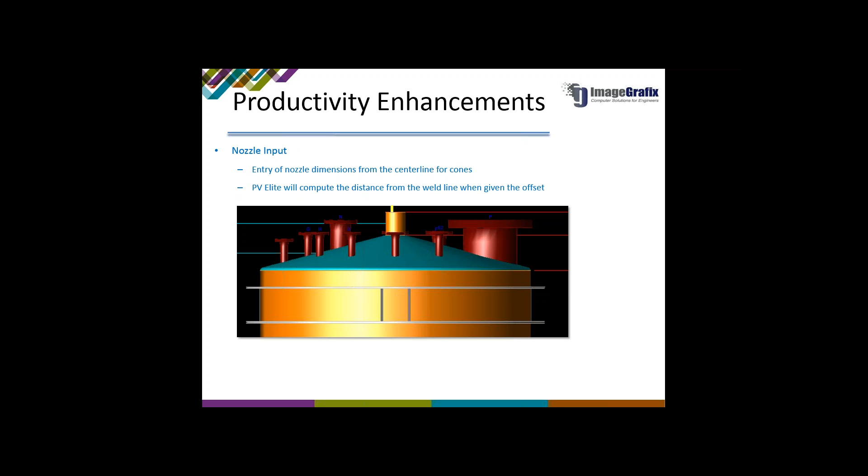Let's move on to the second point. This was again a very good feature they introduced in this version of the software, that is the Appendix 2 calculated flange on the end of the nozzle.

What we are doing over here is now we can model a standard flange or a non-standard flange to that nozzle neck. In the earlier version, when we used to model a nozzle, whatever information we used to provide - that the flange is a weld neck flange or a different type of flange - the assembly used to look the same, and PVElite was not doing the Appendix 2 calculation for the flanges on the nozzle. So now it is possible, now you can model a flange to that nozzle, but there is some tricky way to model it.

You might have modeled the sump head in the earlier version. The same procedure applies to model that flange. When we used to model a sump head, we used to go to the last element, attach the elliptical dish, then click on the sump head, check this box, then connect it to the parent nozzle where you are going to connect it. So this is the same way we are going to attach the Appendix 2 flange.

I will be showing it to you once I am completing with the PPT presentation, then we will open the software and we will discuss on how to model those things. So let's move on to the next.

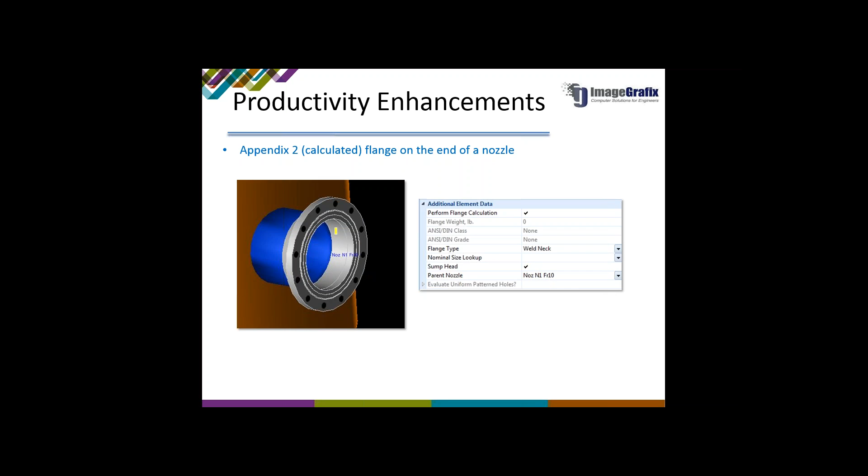Now you can model a mating flange which is connected to the weld neck flange or a blind flange. This also can be possible now in this version. The modeling procedure is the same - the way you are going to model a weld neck flange, in the same procedure, we will be going to model a blind flange.

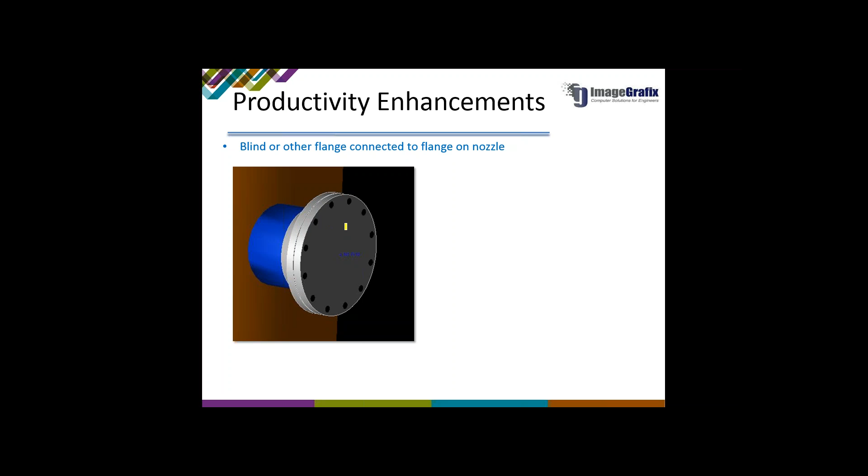Now you can model a nozzle on the blind flange. In the earlier version, when we used to model a nozzle with a blind flange, we were not able to attach the nozzle onto that, because PV Elite does some modeling based on node numbers. When we used to attach a flange to the nozzle, the flange was not having a node number, so modeling the nozzle onto that blind flange was not possible. But now, since the procedure has been made for the Appendix 2 flange, you can model nozzles onto the blind flange also. I'll be showing this to you later on.

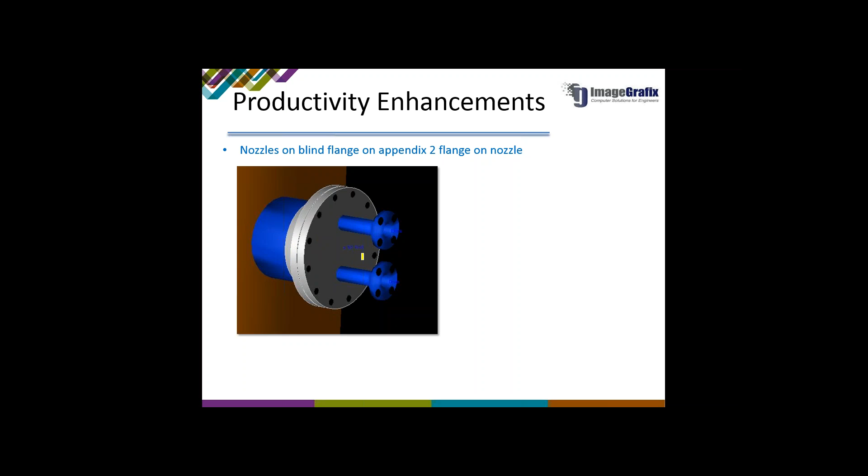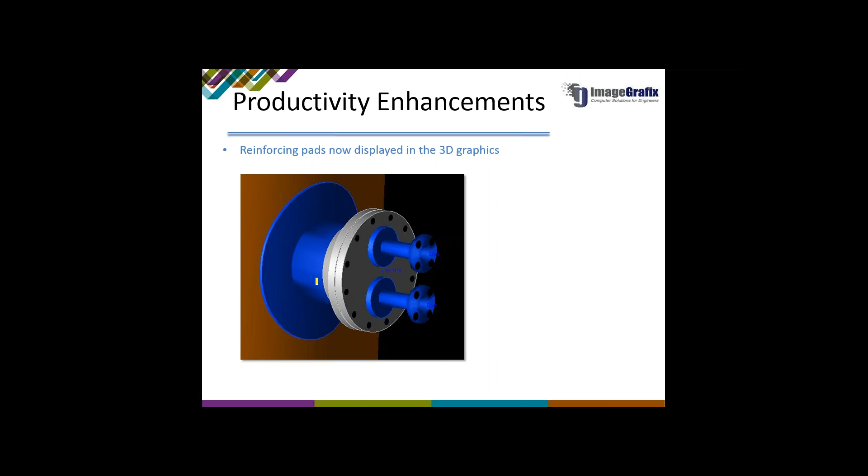Same thing over here, you can see the repad graphics, the curve, everything is clear now, and the edges mainly are also clear now.

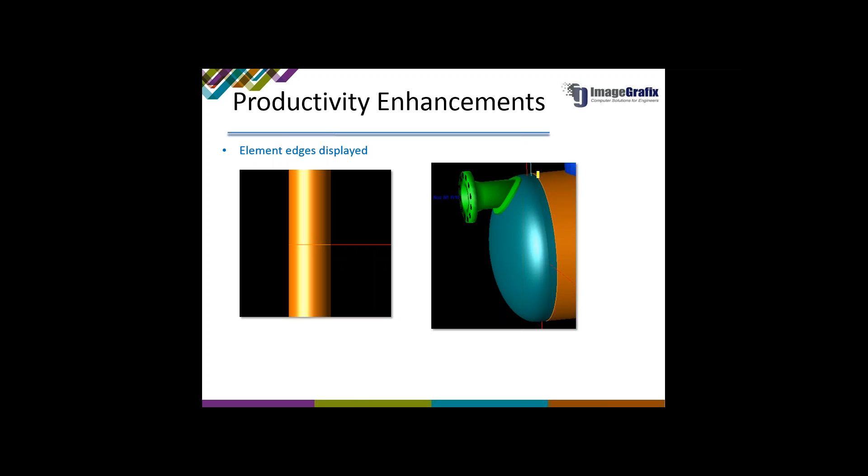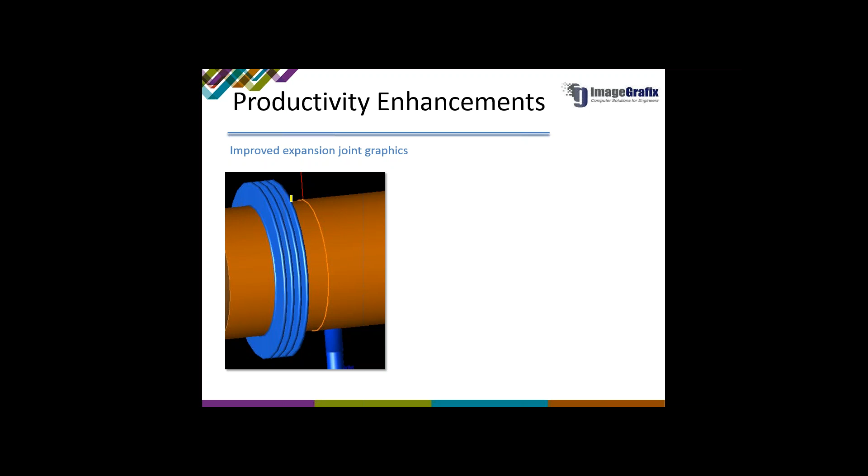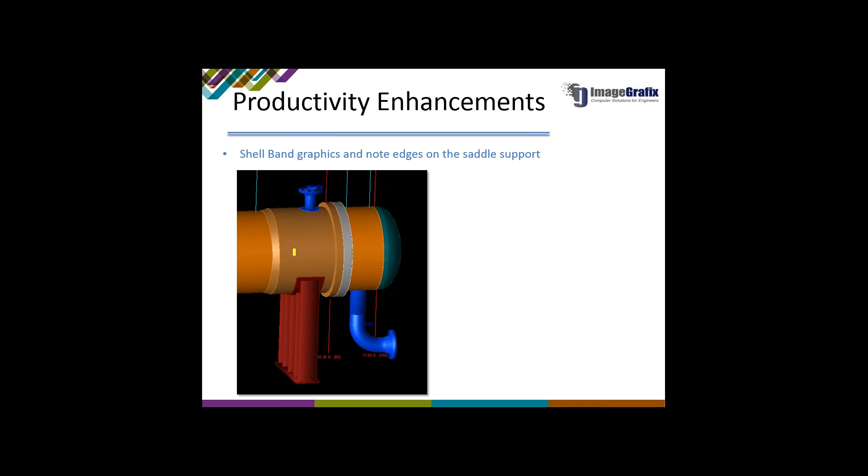And you can see the edges clearly also. Then the next productivity is the forces and moment symbol on the nozzle. This is just a symbolic representation - it doesn't have any connection with the design. It just indicates that this is the nozzle where we have applied the local stress analysis.

Earlier, we applied local stress analysis on a few nozzles, but after some days we weren't aware, and we used to click on each and every nozzle to check whether we had applied the local stress analysis to this nozzle or that one. But now, just by seeing the 3D model, you can figure out that this is the nozzle where the local stress analysis has been applied, where we are doing the WRC calculation. So this is just a graphical representation.

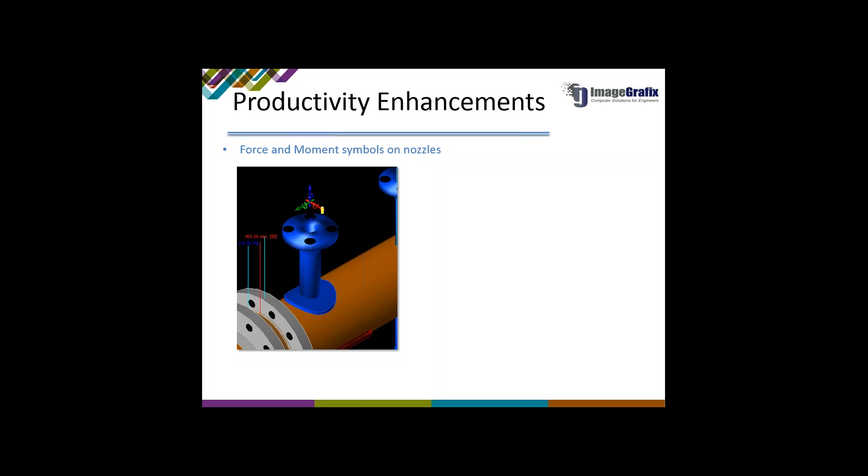Then next, now you can see the hole in the skirt itself. Even in the earlier version, PV Elite was doing the area opening skirt opening calculation, but the client used to ask whether PV Elite was actually doing it, because that time it was just a graphical problem - we were not able to see the hole in the skirt, even though PV Elite was doing the calculation. So now they have improved the graphics, and now you can see the hole in the skirt also.

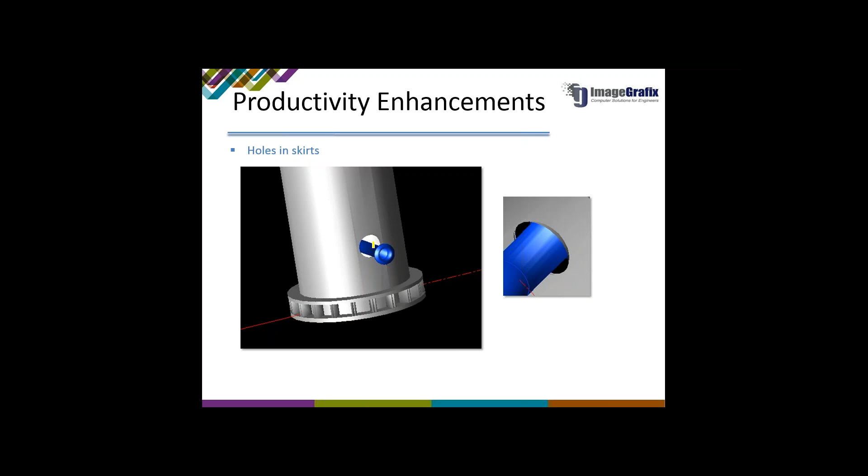The next productivity feature is the knuckle and flare shown in the graphics. When we used to model a cone till 2015, it was just a straight cone. But now from the 2016 version, you can give the knuckle radius and flare. So the knuckle and flare portion can be easily seen in the graphics for both cases. They have updated that as well.

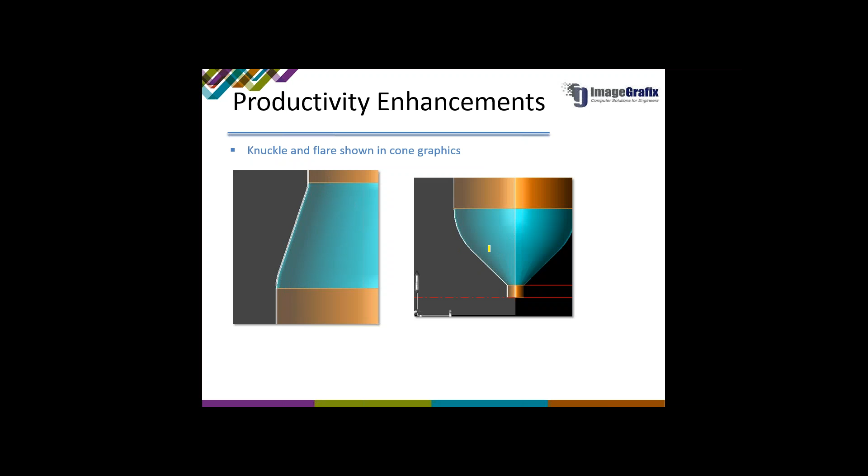The next productivity feature is the color coding display. This is just a legend which was there in the earlier version too, but since they have added a repad in this version, you can now figure out that this is the nozzle with the repad having material SA516 grade 65, and this is the nozzle with the repad whose material is SA516 grade 70. That is the only addition they have made; the rest was already there in the earlier version.

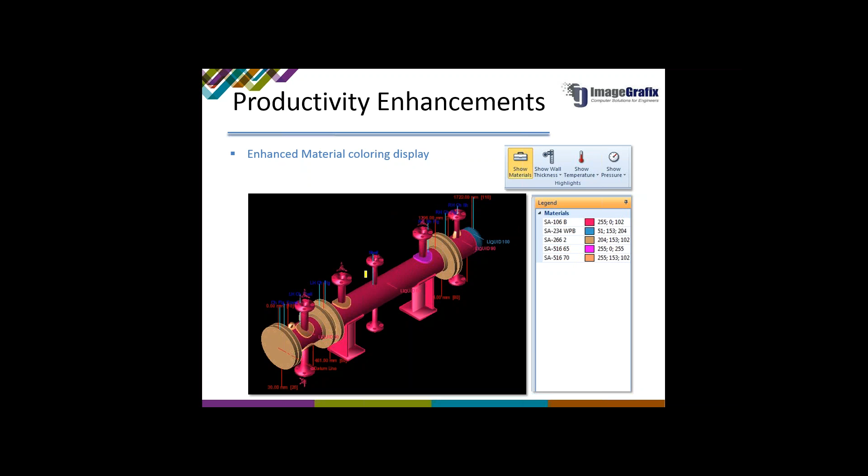The next productivity feature: till 2015 we only had two options, heading text and title page text. Now they've added new information, the drawing and revision information. You can give the reference number, revision number, client name, drawing number, and contract date. Whatever information you feed in will get updated in the report too, so you don't need to rename your job file as revision A or revision B - you can directly update it in the software, and while viewing the report you'll know it's revision 2. You can also type the contract date, drawing number, and client name, and this will be visible in your report.

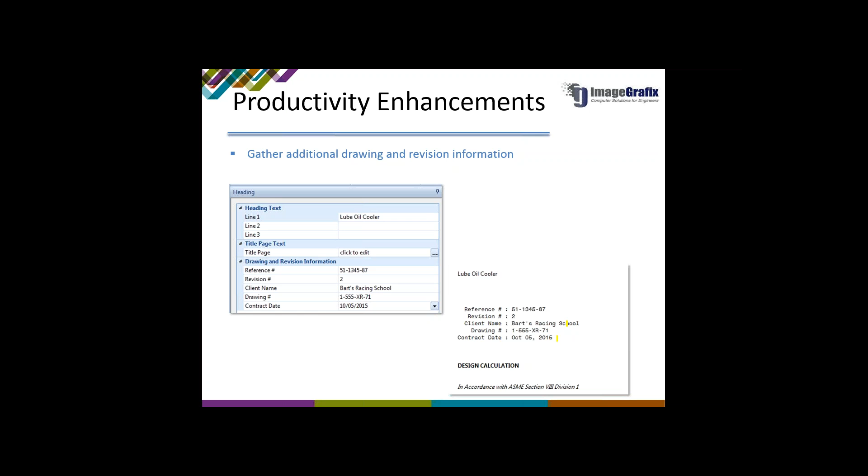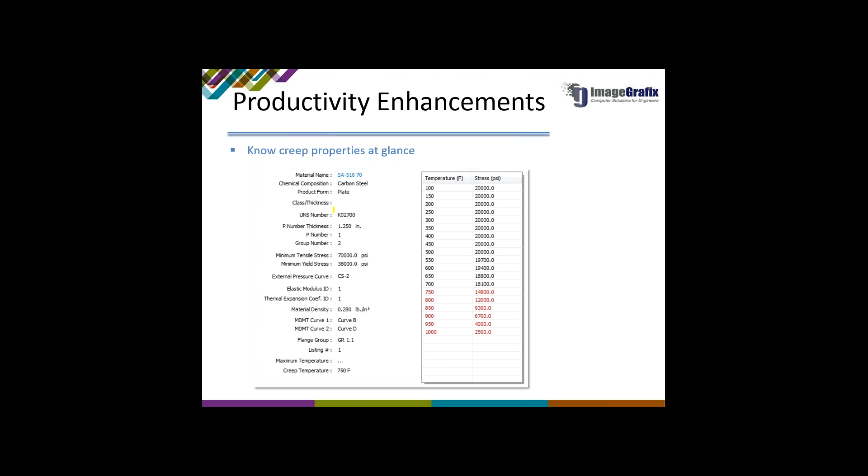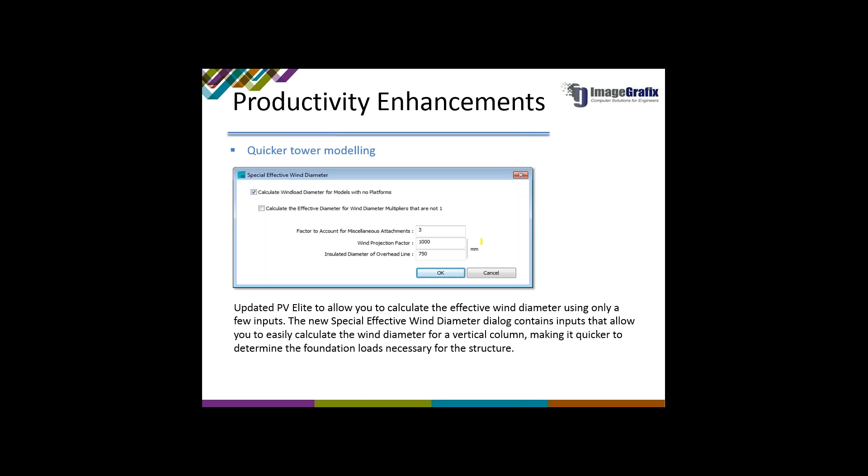The next productivity feature is quick tower modeling. I don't know how many people use this, but it's a very good feature. We updated PVElite to allow you to calculate the effective wind diameter using only a few inputs. The new special effective wind diameter dialog contains very few inputs that allow you to easily calculate the wind diameter for a vertical column, making it quicker to determine the foundation load necessary for the structure. What we're doing is artificially increasing the diameter using this equation so you get higher wind loads in the bending moment, helping you estimate the foundation cost and plan accordingly. This feature goes hand in hand with the next one.

Instead of this, what I'll do is just add this miscellaneous weight, so that it will give me the estimation result with respect to the same. Based on this, we can submit the report for the bidding stage.

One more thing we added here: earlier we were having only two tabs. If you go through the loads dialog box, you'll find the miscellaneous weight percentage option. In the earlier version we had only two tabs, so now we've added the ability to add percentages to increase the weight of shell and heads. With this feature you can build even faster. This is a very good and handy feature for the estimation stage.

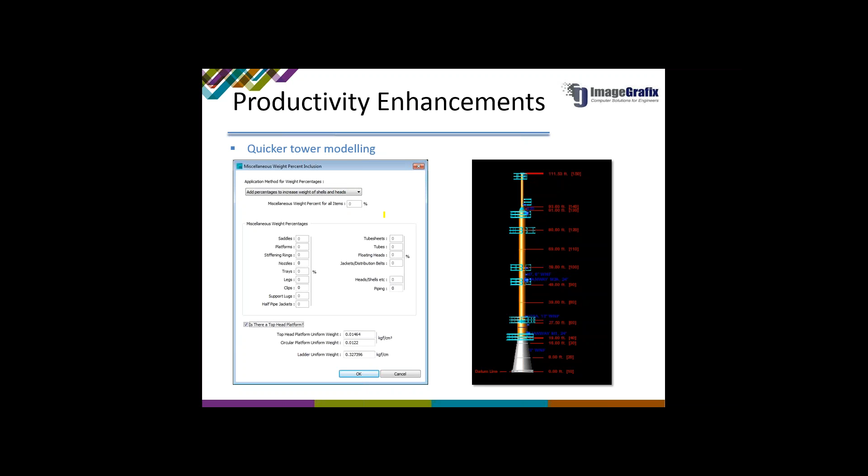Okay, so this was all about the productivity enhancements. Let's move on to the next part, the code update.

This is just a mandatory code update. We have added the Section 8, 2015 code in the 2016 version of the PV Elite software.

In division 1, the update happened in the UHX, the minimum operating pressure. Earlier we only had the option to put the max operating pressure, so the software used to do a lot of iteration to get the results. Now they added minimum and maximum operating pressure in the UHX. If you input both, it cuts down the total number of cases you have to run. Before you may have gotten 3 to 4 case combinations, but now it will reduce your load cases. This is again a pretty good feature they have added.

Then for nozzle reinforcement, welded pipe higher allowable: when you have a welded pipe or tube, the allowable stress according to Section 2 Part D was like 85% of what could be used for reinforcement. So for a welded pipe or tube, when you run the nozzle reinforcement calculation, the allowables were automatically divided by 0.85, and that stress allowable was used in the calculation. Because of that higher allowable stress, the area opening calculation was getting reduced, so you get a little less area required and a little more area available. By increasing the allowable stress, it helps reduce the nozzle thicknesses.

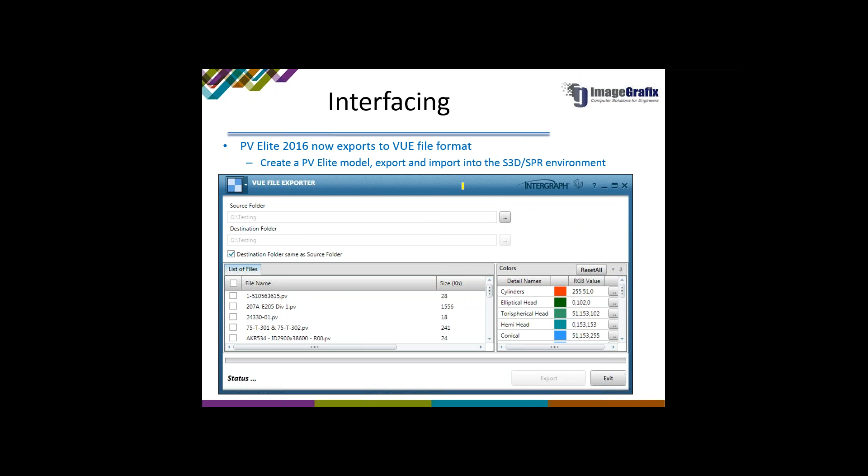Next, this was actually a bug in the earlier version. While doing base ring design, when we selected the base ring design option as Brownell and Young design or Brownell and Young analysis - two options were there - the software was not automatically taking the neutral axis shift method. Though it was doing the calculation as per the neutral axis method only, it was taking some other option. Now the software will analyze according to the neutral axis method only. So whenever you select Brownell and Young design and analysis method, it will directly use the neutral axis method for thickness calculation.

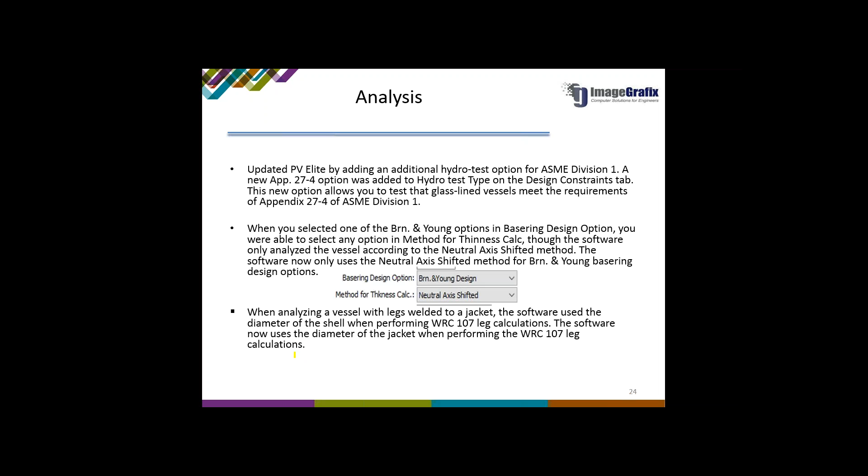Next is the output generation report. This is just the first step. Now you can have a light heading table, and you can give the color theme for this. You can change the color theme from blue to white or any other color, and make some changes. If I go to the next slide, the reports are printed in a tabular format, so you can give the table heading color or the table body color. So all those things you can do over here. This was the changes they have made in the output generation report.

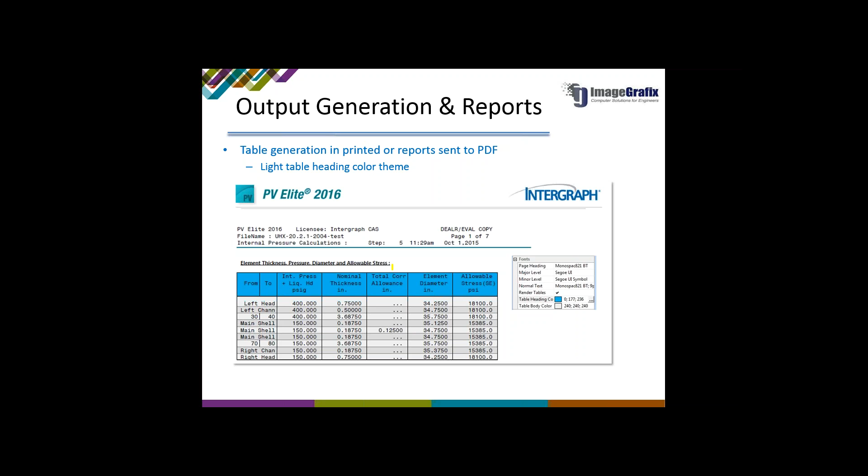So let's move on to the software. I'll show you how to model an appendix-2 flange in PVElite 2016.

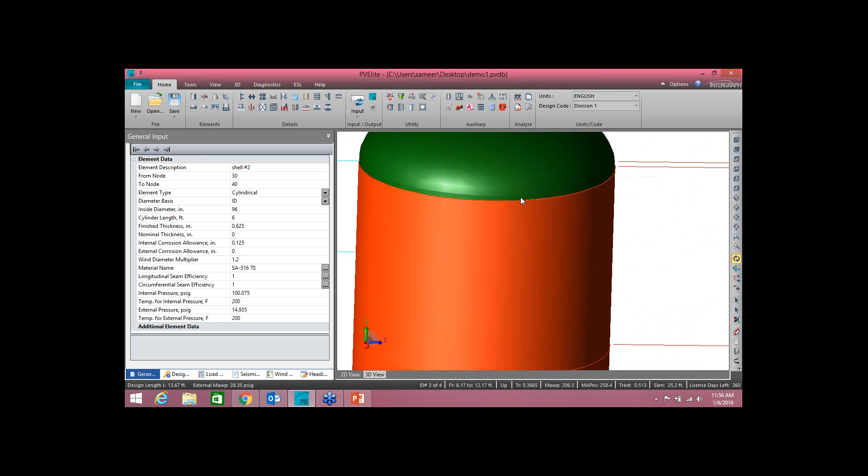So what I'll do is open a sample model. This is just a demo example. If you see over here, you can see the circumferential weld line. By seeing the 3D model itself, I can figure out this is shell number 1 and this is shell number 2. The edges of the weld line are also clearly visible to you now.

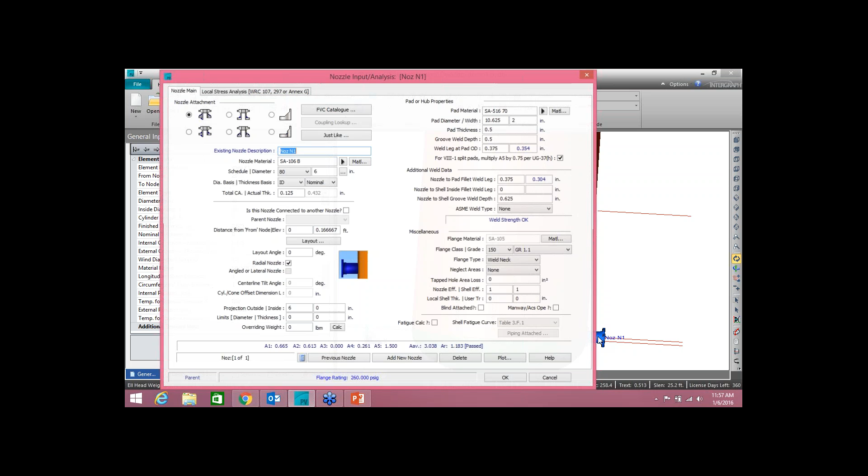Now let's say I want to attach a nozzle on my shell number 1. I'll select this and attach a nozzle over here, and I'll name this nozzle N1, a 6-inch nozzle with schedule 80. I'll add a repad over here, then click OK. I'll give some height, the shell height, that is 3 feet.

So you can see over here the repad graphics is clearly visible to you now. So you can see the repad in the 3D model.

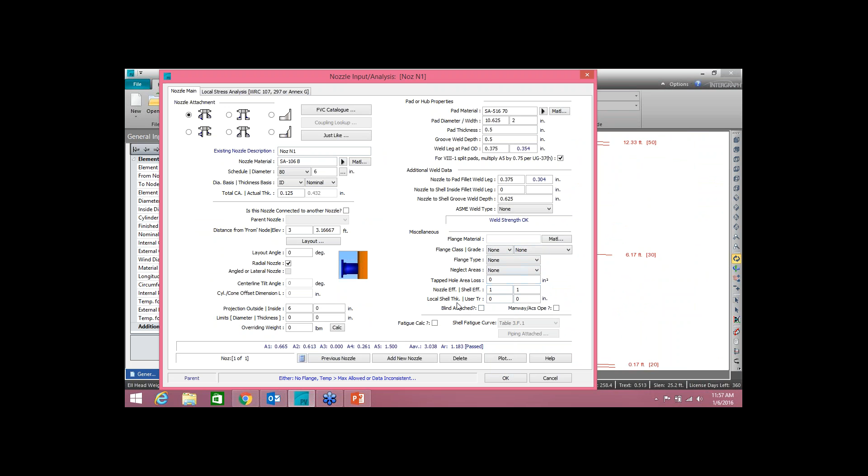Now let's say if I want to model an appendix-2 flange over here, how can you do it? I'll just click on the nozzle dialog box. I'll make this flange as none, since I want to design the flange as per my requirement. So I'll make it none and select OK. So now this is just a nozzle neck over here.

I'll go to the last element, then select the flange. Just ignore the figure right now, because over here you can see the flange has appeared on top of the dish. So I'll name this my weld neck flange.

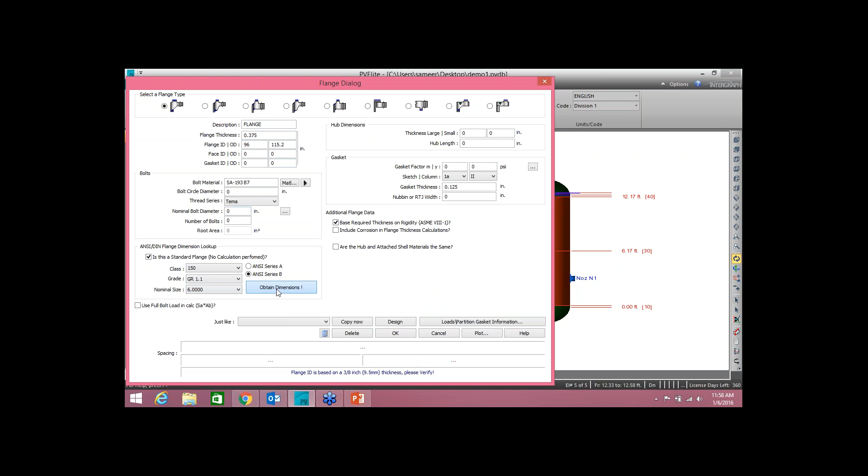I'll scroll down and click on perform flange calculation. I'll click it as a standard flange, 6-inch. You can design a non-standard flange also. I'll click OK.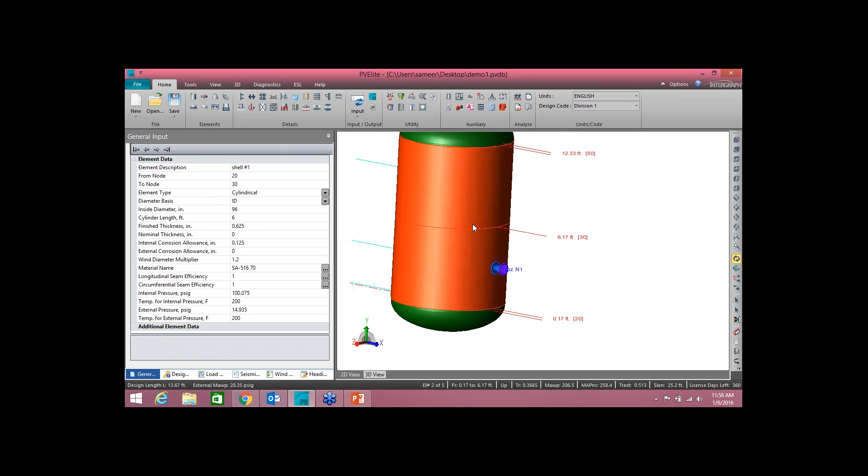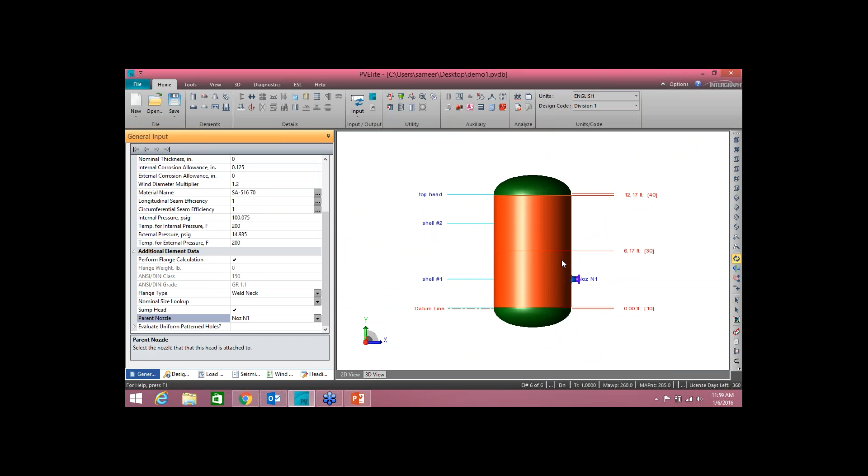In a similar way, if I want to attach a blind flange, or mating flange you can say, to the weld neck flange, I again go to the last element. I'll select the flange, then rename this as a blind flange. I'll go to perform flange calculation, check this as blind flange, obtain dimensions. Then again I'll check the sump head button and click on parent nozzle. So this way I've modeled the blind flange to the nozzle.

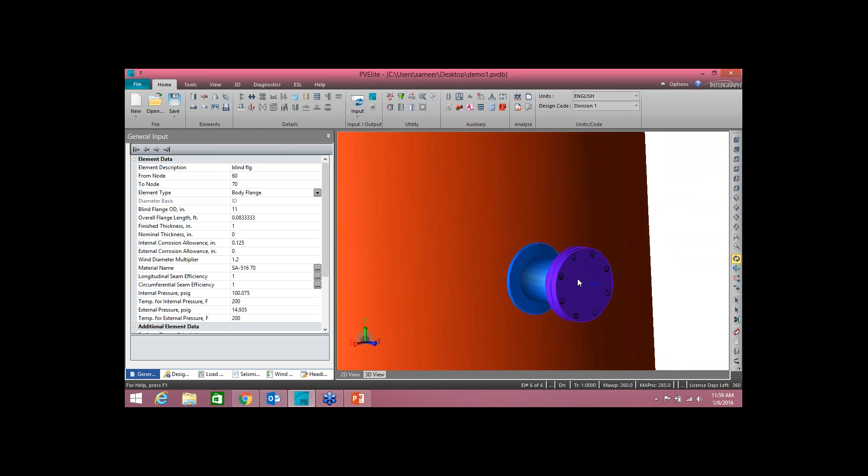Now if I want to attach a nozzle to the blind flange, I'll simply click the blind flange. Now you can see the nozzle tab is visible. Earlier it was not visible when it was just a standard nozzle with the flange, since the flange was not having a node number. Now we have designed the appendix-2 flange as per the node numbers, so now I can model a nozzle onto that flange. The moment I click nozzle over here, I can directly select a 2-inch nozzle or whatever. This is the way you can model a nozzle to that blind flange.

So let's say if I want to run this file and see the tabular report which we have seen in the PPT, I'll just run this file.

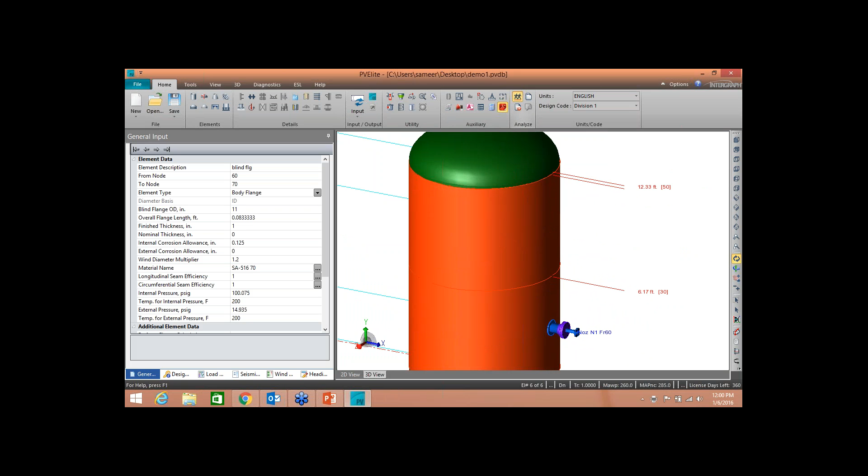Okay, so if I want to generate a report, I'll just click over here and see whether my reports are coming in a tabular format or not. Okay, so I'll print to PDF.

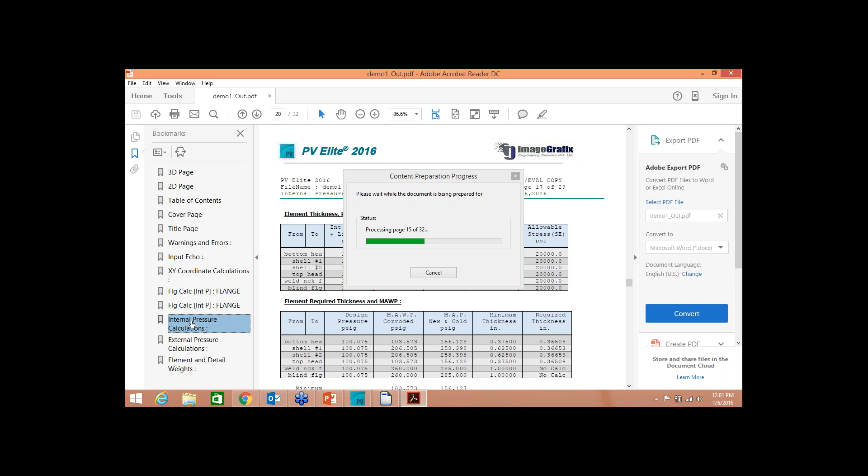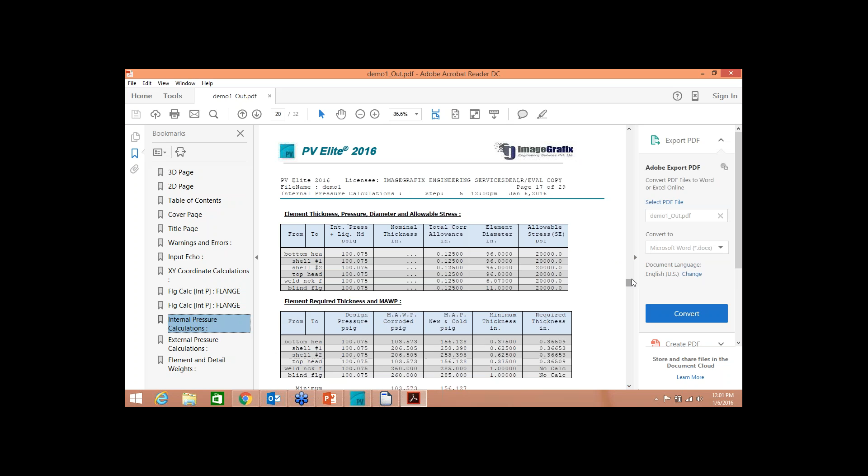I've selected very few so that the report gets generated soon. So now you can see the reports are coming into the tabular format. Element thickness, pressure, everything in tabular format, so that you are able to see it. This is a very nice feature they have updated in this version.

Also, you can see over here you can change this Intergraph logo. Earlier when we used to generate a report, the Intergraph name automatically appears over here, so you can change that to your company template also.

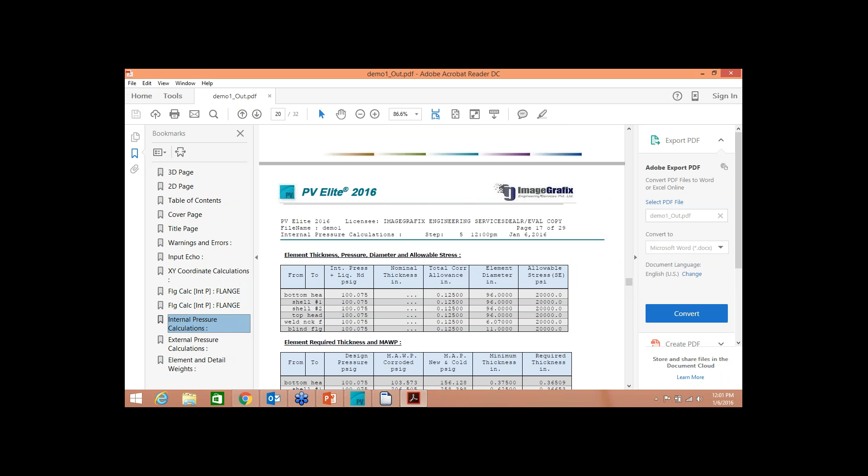So this is what you've seen in the file, when I select preview print, there is an edit header option. The moment I click on edit header, I can change that logo and pick my company logo, as I have kept the ImageGrafix logo here. You can do the same thing and save the file, and then it will reflect in your report also.